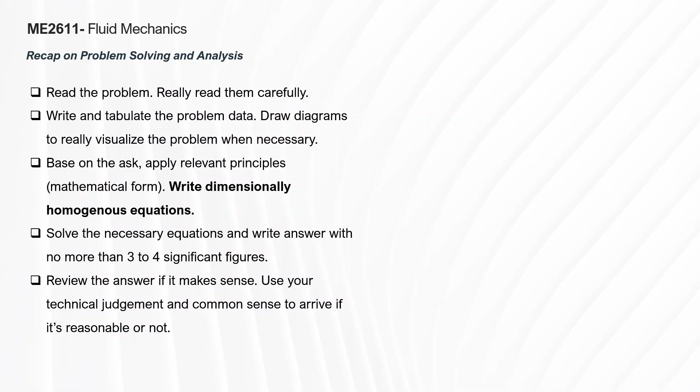Just to give an example, for here, like I said earlier, if you have 10,000 Newton per meter squared, basically that's Pascal, right? It's nicer to look at it this way. You can write, if that's your final answer, write here 10.0 kilonewton per meter squared, or essentially kilopascal. Okay? That's it, and then let's paste this.

Okay, so let's go straight in. Let's dive right into our answers. Oh yeah, one last reminder.

Make sure to review your answer if it makes sense. Back from your statics days, sometimes you get angles and you're looking for the direction from the positive x-axis, measured counterclockwise. Sometimes you get an angle from the other quadrant and you forget that it needs to be measured from the positive x-axis, so you need to add 180 degrees. Same applies here. Does it make sense with the signs? Does it make sense with the direction? So just review the final answer before boxing it up. Okay?

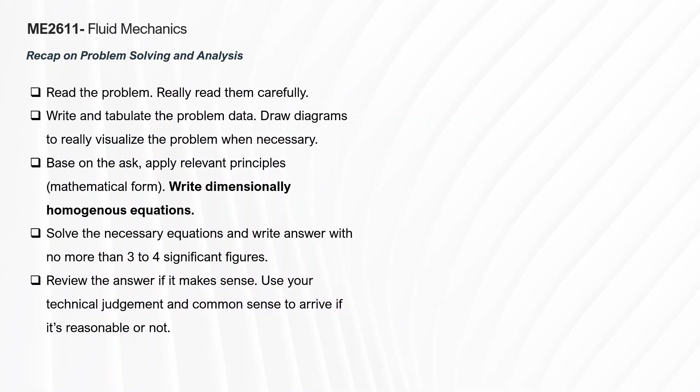Okay, so we have here: the viscosity of a fluid is to be measured by a viscometer constructed of two 40-centimeter long concentric cylinders, Figure 2-30. The outer diameter is 12 and the gap between the two cylinders is 0.15. So 12 is the outer diameter, and we have 0.15 here as L. Then the inner cylinder is rotated at 300 revolutions per minute. Take note it's revolutions per minute, so it's not yet angular velocity, you have to multiply this by 1/60, right? And then the torque is measured to be 1.8 Newton meter. Determine the viscosity of the fluid.

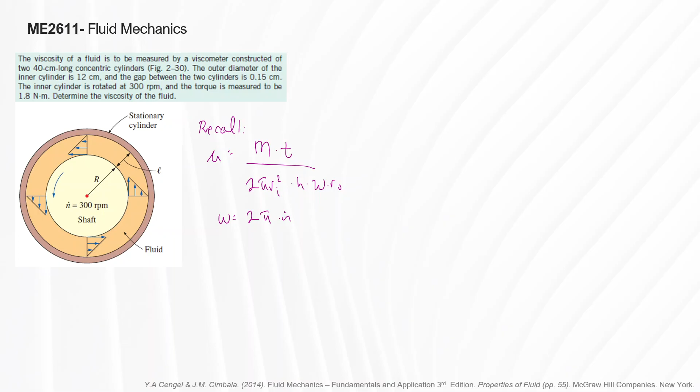Okay, recall that when using a viscometer, for this type of problem, we have the formula: Mt divided by 2 pi Ri squared times h, times W times Ro, where the angular velocity is on the outer diameter, and the angular velocity is simply 2 pi n. Okay?

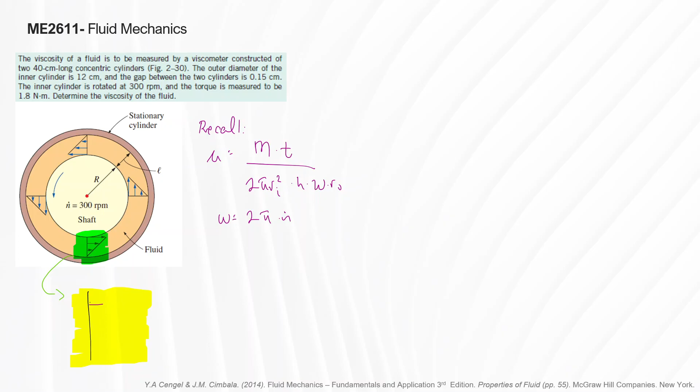So as you can imagine, this is also what I showed before. The U, essentially, is W times Ri that's used here since this is the rotating body, that's what's moving here. In books, you'll see it labeled usually 1 and 2, and for the equation du/dt, the equation is usually 1 minus 2, 1 minus 2. In this case, given is R1 minus R2, which is just the difference here, that's L. If you recall, this is point 2, this is the no-slip condition, so the velocity here is 0.

And here, it has velocity. So hence, we get from the outer diameter, velocity minus the inner diameter here. Okay, wait, it's actually reversed. So this is the inner, moving velocity minus the non-rotating body. Then you just substitute the values there, and you'll get the final answer as 0.158 Newton-second per meter squared.

Okay. Anyway, so this is... yeah, 0.06, there we go, cubed. Yeah, this is from last time.

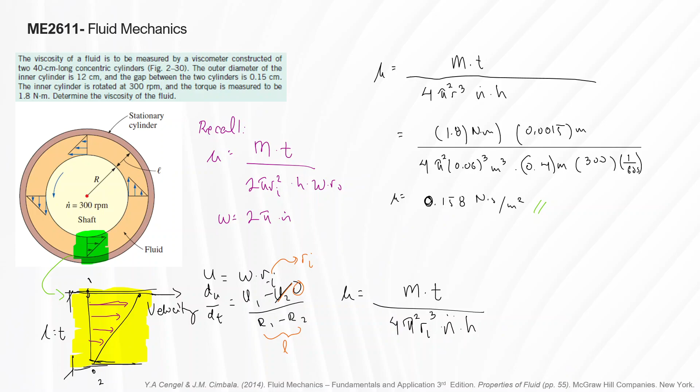So for our actual problem sets, we'll be dealing with much easier viscosity problems, I'll show you how. And then I've given you the problems boxed for you guys to answer. So take that home as your assignment. I've already given instructions, hopefully you've read them on Canvas. Let me know if you have questions there. I've also given the final answer so at least you'll have confidence to practice around this.

But I'm thinking whether I should keep giving the final answer until we reach finals, before finals. Maybe I'll give a problem set without the final answer to test your confidence instead.

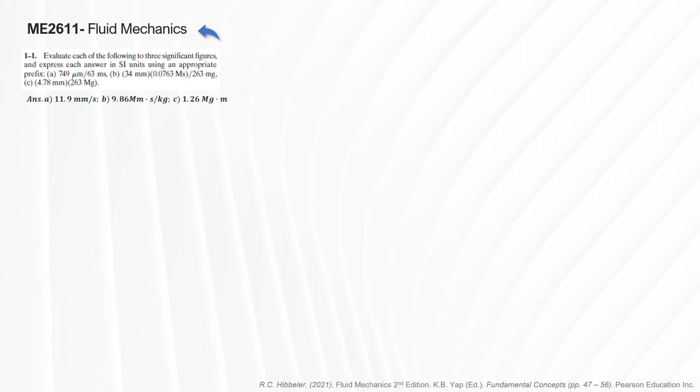Okay, so ano yung mga problems na yan? So far wala actually. Okay, actually meron pala to. So for A, we have milliseconds dito. We have megaseconds. Ito, with milligrams rin. And then ito naman with megagrams. So ang goal natin is, kailangan i-convert natin to at least base unit yung denominator. And then the rest, we apply yung appropriate prefix lang naman doon. Alright, so far so good.

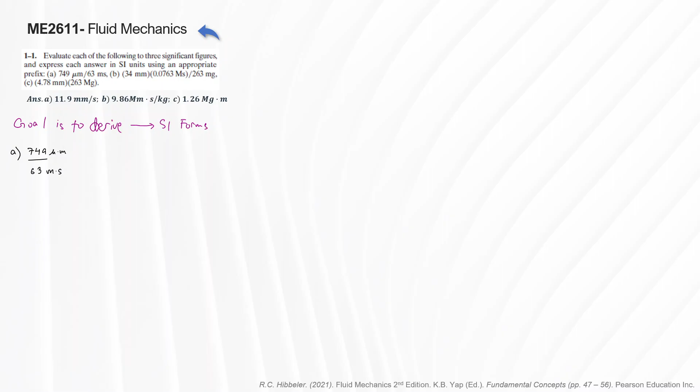So wait lang, let's go back dito. So let's go one by one lang naman. So the goal is to derive SI forms. Okay, so let's start with 749. So nakalagay dito, micrometer divided by 63 milliseconds. All you have to do lang naman is express mo na sila in their respective exponent form, scientific notation kumbaga. So ang base unit nito is meter.

Micro is 10 to the negative 6. And then ito, milliseconds, seconds yung base unit nito. And yung milli is 10 to the negative third. So if you recall pa yung rules of exponents, you just apply it, and you would get 11.889 times 10 to the negative third meters per second, or essentially this is just 11.9 millimeters per second. Pag lumabas sa exam to, is very specific naman. So 11.889, pero sabi sa akin is kailangan convert to into 3 significant figures. So kailangan 11.9 to, and then ilagay ko yung appropriate prefix. So 11.9 millimeters per second.

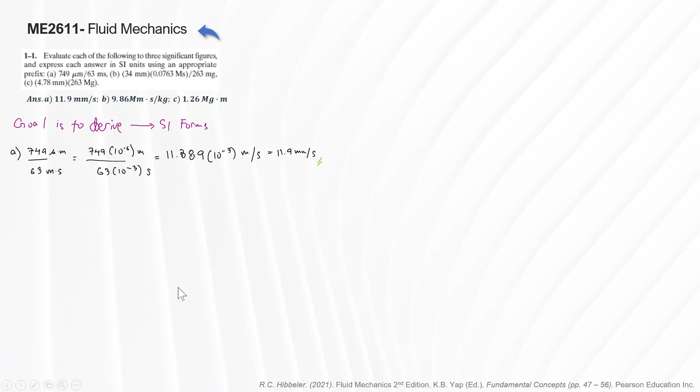Wait lang, I don't see yung questions dito. Okay good, so continue lang. Okay, so sa second one, ganun rin. So we have 34 millimeter multiplied by 0.0763 megaseconds divided by 263 milligrams. So medyo masakit tignan siya pag nakita natin yung operation. So we have to simplify it lang further.

Again we do it by just converting it, again, to its appropriate prefix. So yung scientific notation niya, yung milli magiging 10 to the negative third, yung mega magiging 10 to the 6, and then of course ito magiging gram. So like I said, kilogram is technically, gram technically yung base unit, pero kilogram is an accepted base unit kasi yun usually ginagamit natin. So kaya kinonvert ko na lang sa kilogram yan. So in this case, if makakita kayo ng gram, convert nyo na lang to gram sa denominator, convert nyo na lang to kilogram para mas magandang tignan.

There we go, so magiging 9.863. Dapat tinanggal ko yung 3, my bad. So magiging 9.86 megameter tapos second per kilogram.

Ganun rin with letter C, 4.78 times millimeter times 263 megagrams. You just convert them, then of course exponents to. So technically mag-add up lang yan into 1.257. So 1.26 dapat, okay, so 1.26 megagram meter. Question sa first problem.

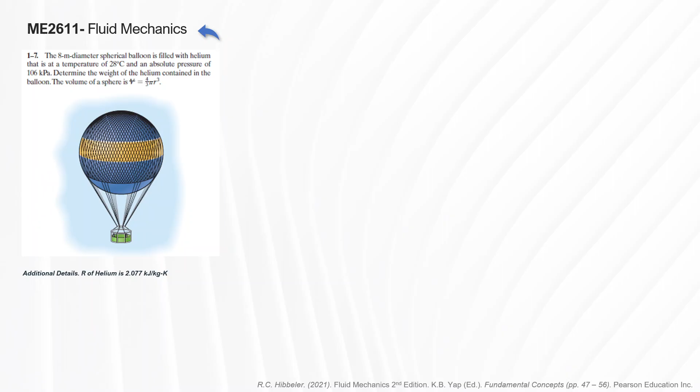So naglagay ako ng additional details dito kasi hindi available lahat ng details for helium. Kung titignan mo, we are required to find yung weight, take note, weight ng helium. At we're given temperature ng 28 degrees, tapos volume ng sphere, kinuha ko na, 8 meters in diameter with yung formula ng volume, and meron tayong absolute pressure na 106 kPa.

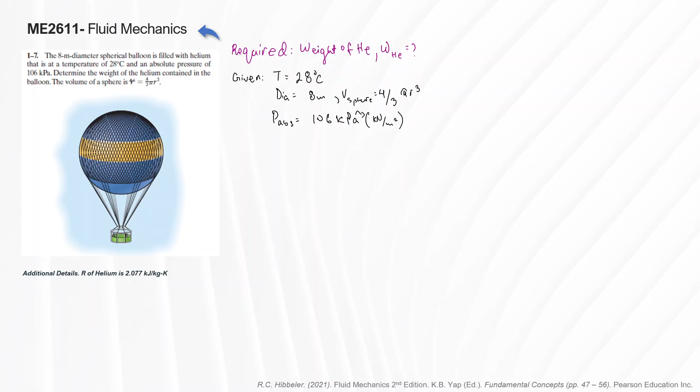106 kPa, well this is kilonewton per meter squared, okay? Now from the appendix ng book, obviously from the pagbibigay ko sa inyo ng exam, bibigay ko na itong additional details. Yung specific gas constant ng helium is 2.077 kilojoules per kilogram Kelvin.

So from here pa lang, from the given pa lang, you would think, hey, recall natin yung parang ideal gas equation problem to. We're given a temperature, we're given a pressure, we're given a volume na, and we're given R. So ang kailangan ko pala is yung PV equals to MRT.

Props dun sa mga nakakuha sa error ko, so tandaan nyo yung 1 o 2 points nyo dun. Pero recall na pag nilipat natin yung volume sa kabila, divide natin sa mass, magkakaroon tayo ng P equals to density RT.

Since we're being asked to hanapin natin yung weight, I just did it this way lang naman. So in short, hindi natin alam yung density dito, yun yung unknown. Going towards mass tayo, and then eventually weight. Kailangan natin yung absolute pressure divided by yung specific, in-arrange ko lang yung formula, in this case hinanap ko lang yung density.

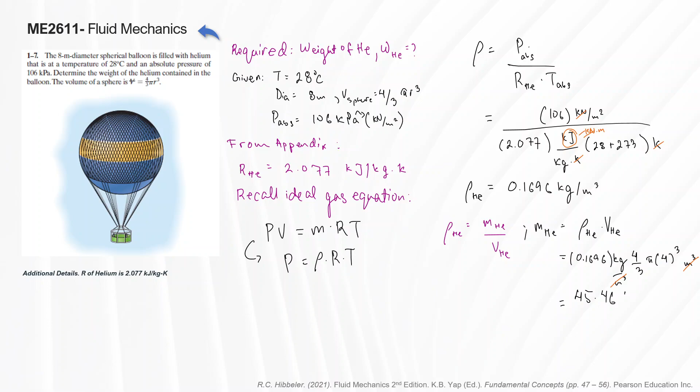Remember yung formula ng density equals to mass divided by volume, so mass is simply the product ng density and ng volume ng helium. We know na yung volume ng helium is 4/3 pi r cube. Remember diameter to, so ginawa ko, hinati ko lang siya, magiging 4 cube meter cube, cancel yung meter cube, and you will be left with 45.46 kilogram.

However, that is still not the final answer kasi we just multiply by the acceleration due to gravity, and we have, in this case hindi na gumamit ng proportionality constant. Magiging 445.87 newtons or 446 newtons.

Tanong ko lang po, pag po solving na ganyan, nakalagay po kasi for yung answer, pero pag po ganyan na 445.87, i-accept niyo po ba kung ibang way, parang 0.75 pag malapit na po, ano nakuha mong sagot? Well, sir, pag hindi po i-round off ng exact, pag po yung mga items, yes. Like I said, sa unang rule ko, okay lang naman yun, basta yung decimal places mo, yeah, okay lang sa akin yan.

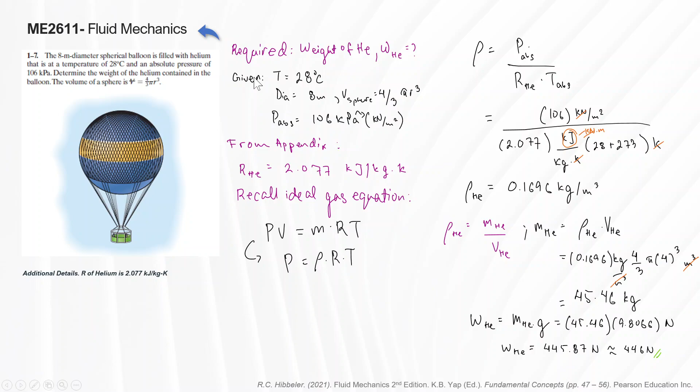Okay, wait lang, sa yung PowerPoint. Okay, so just one example ng ideal gas equation problem natin, ano? Sige, let's go for more. Balik tayo dito, okay, ano pa?

So ito yung helium. Okay, let's go naman with glycerin, something exciting naman ng konti. Okay, so let's just click this up lang.

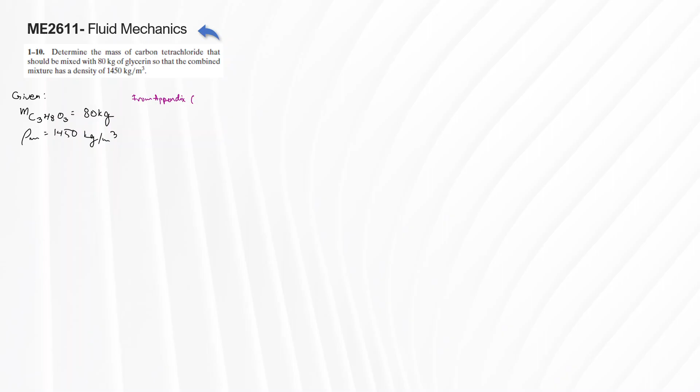Not sure kung binigay ko sa book to. Nag-provide ako ng additional details dito, like yung density ng glycerin, yung density ng carbon tetrachloride na galing sa book, and just like sa exams, I'll provide rin yun. Kasi come on, hindi ko matatandaan lahat, alam ko lang yung water, and even yung mercury, yun na yung pinaka-max. Okay, balik tayo.

Okay good, so kinuha natin from the book yan. Yung density ng glycerin natin is 1,260 kg per meter cube, and yung density ng carbon tetrachloride natin would be 1,590 kg per meter cube.

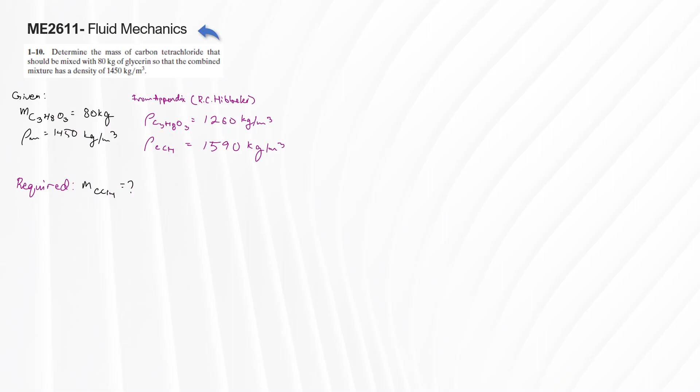Kailangan natin malaman is yung mass mismo ng carbon tetrachloride. So ang solution natin, if you recall, yung density is equals to mass ng substance, or in this case mass ng mixture divided by yung total volume ng mixture. So that would make sense na yung mass ng mixture is equivalent to the sums ng mass ng glycerin and ng carbon tetrachloride natin, ganun rin with its volume.

So kinuha natin yung volume ng given natin na glycerin. Kinuha ko rin yung volume ng tetrachloride. And then I just equate lang yung equations na yun, just like so, para ang matira lang natin is yung mass ng tetrachloride.

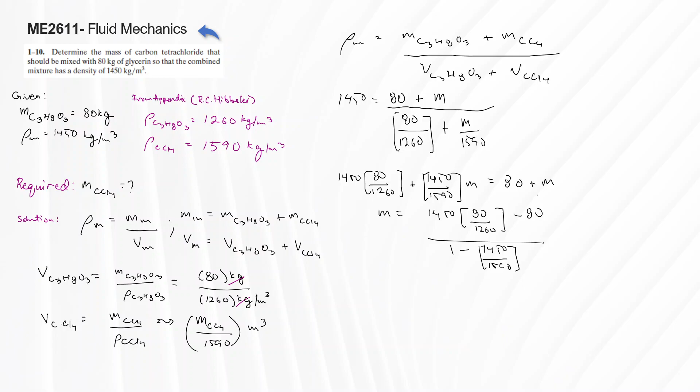We have yung 80 over 1,260 equals mass over 1,590, 80 plus m. And ang matitira natin dito, i-isolate natin equation ng m. And we have 137 kilograms.

Now okay, paano natin check to? Substitute 137 dito sa density, and then solve natin yung volume. And then if yung density mo is 1,450, or close to 1,450, we're good.

Yung mga steps ko sometimes may be a longer method, pero sometimes I realize mas magandang ipakita ko yung longer way lang naman, because yung shortcut can be down the line na lang naman. So it's important for me to break it down for you guys rin. So if you did this in a much shorter way pero we still arrive with the same answer, that's fine by me. As long as I read it and I understood it, sige. Pero pag di ko naintindihan, tatawagan naman kita, paano mo nakuha to exactly? Pag in-explain mo, that's fine, pero pag maraming tanong, ako pag-isipan ko kung consider pa yung question na yan.

Alright, so easy peasy lang, no? Almost direct substitution lang, so ang important analysis dito, yung bulk ng work mo is actually nandito na. Nag-analyze ko muna ng given mo and then you establish yung equation na gagamitin mo, and then from there is just execution na lang. And then the rest is practice.

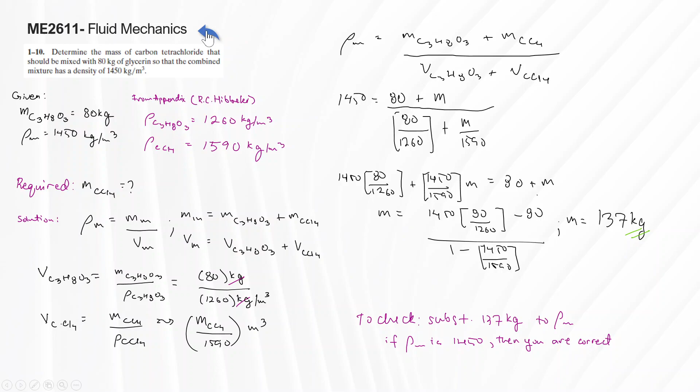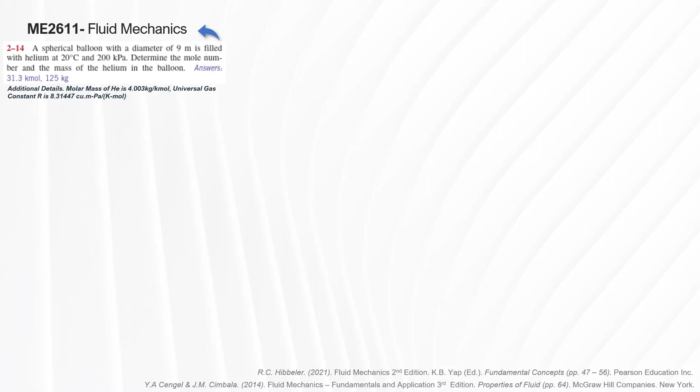Let's imagine this is the sphere, with a diameter of 9 meters. You can interpret the given this way too, draw it however is comfortable for you. We have the temperature of 20 degrees here, and we know there's a pressure of 200 kilopascal.

Take note that this is 20 degrees Celsius, not absolute temperature. And I believe it wasn't stated... what did I write here... I believe 200 kPa, we can assume this is absolute pressure too. So we're here to find the symbol for mole number, N, capital N helium, and then the mass of helium.

Here are our other givens. We're given 8.31447 - I just converted it a bit so our cancellation later is exact. So I removed the Pascal and made it kilopascal, removed the mole and made it kilomole, to go directly into the cancellation when we use the gas constant. So this is technically still the same: 8.31447 kilopascal meter cube per kilomole Kelvin. And then we have the molar mass, 4.003 kilogram per kilomole.

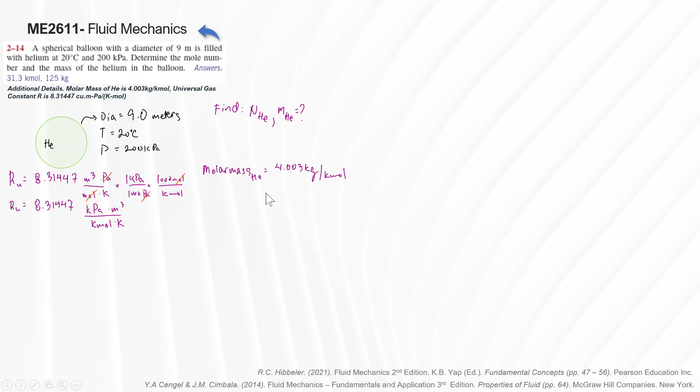So these are our givens. We know mole is involved, so the formula we'll use instead of the standard PV=MRT, we can also use PV equals nRT.

This is the conversion from mole number times molar mass to actual mass - that's the purpose of molar mass, you multiply it to the mole numbers to get the mass. But in this case, I think we can get the mass first - actually, we'll get the number of moles first.

Let's equate and rearrange our equation further. Our unknown is N. N is equal to pressure times volume divided by the gas constant times the absolute temperature. You substitute the values as such.

So we have 200 kPa - yes, that's right. When it's not stated as absolute pressure, you just assume - you can assume it's an ideal gas, and you can assume it's absolute pressure there.

And then the volume, which we remember is 4/3 pi r cube. We have a diameter of 9, so the radius is 4.5, so that's 4.5 cubed. And then we substitute R, which in this case is the universal gas constant. Since what's involved here is moles, we use the gas constant - a bit of background from your chemistry before.

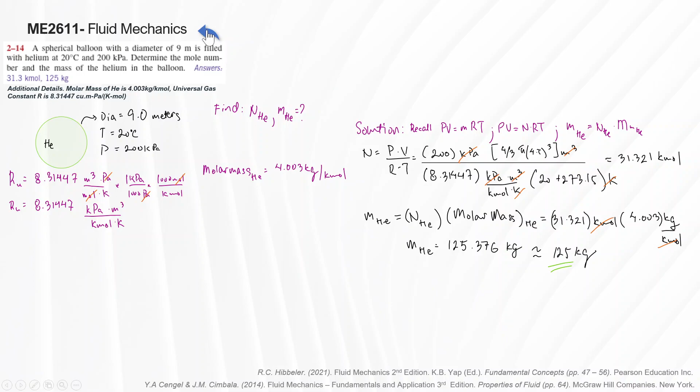Okay, anyway, let's go back here. So that was fun, right? Sometimes the given translates that way, but if you manipulate the formula well enough and know your basic chemistry principles, you can still figure it out. Either way, when I give a problem, I'll still give additional details so you won't have to go searching everywhere.

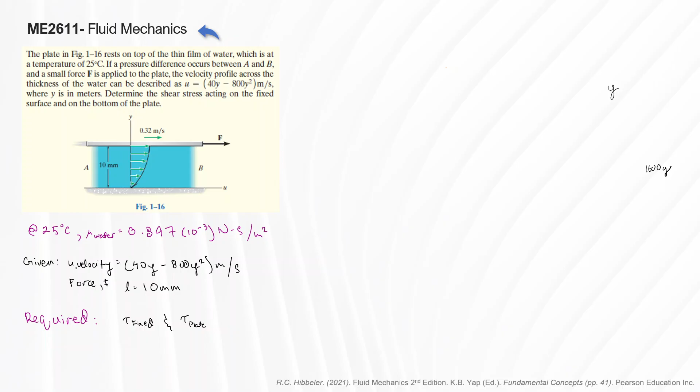So ito yung symbol ng shear stress natin, tau. Recall that yung shear stress is yung dynamic viscosity times yung velocity gradient, du dy. Remember, this is yung velocity profile, non-derived pa siya, so meaning i-differentiate mo pa siya, okay? Just bear with me lang. Do not be intimidated with this du dy thing, okay?

So ano ba yung silbi nan? Remember ito, pag nag-derive ka dyan, mag-equivalent niya is 40 minus 1,600y to the negative 1. Diba? So ito yung gagamitin natin equation. Ito yung derive, ito yung equivalent niya, okay?

So kailangan lang natin malaman muna is yung from the non-fixed plate. So from here, obviously yung velocity natin dito is 0 eh. Remember, lagyan mo na ng 0.1 and 2 to. Okay, 1, 2, 1 minus 2. 1 wherein 0.1 mo may moving velocity ka, 0.2 mo is yung usually yung fixed surface mo.

So yung y na to, ito rin naman yung 10 millimeter. Sorry, nilagay ko na lang as L, dapat y ko na lang nilagay. So ang ginawa ko na lang dito, we just substitute lang naman yung y. So ito yung from the non-fixed plate, so yung distance dito is 10 millimeter or 0.01. I simply substitute it lang dun sa y value ng 1,600y. And then if you would multiply them all together, you will just reach yung 21.5 millipascal.

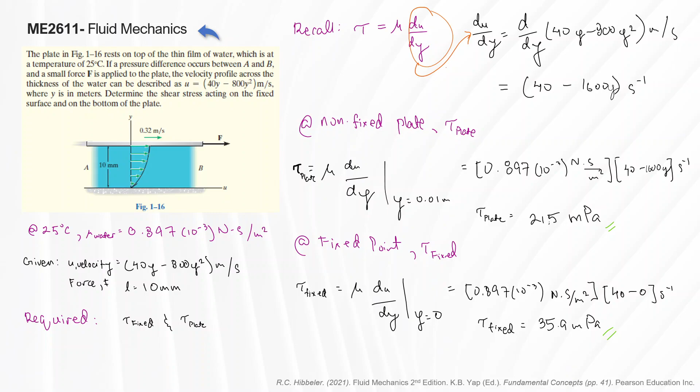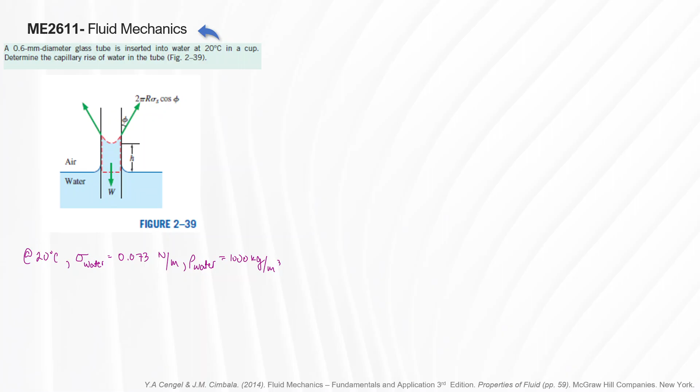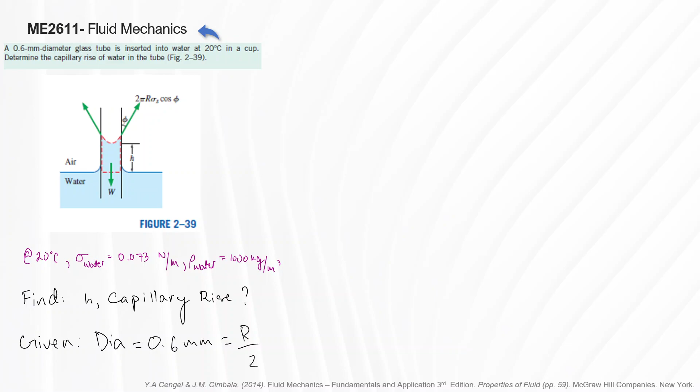So H, basically yun yung formula ng H, ano? Yung H ang hinahanap natin. Capillary rise ba or drop to? Okay? So we're given yung diameter na 0.6 millimeter. So divide na lang natin by 2 yan eventually.

So ang solution natin, kung ma-recall natin, yung capillary rise or drop is simply 2 times yung surface tension, sigma, I believe it's sigma, divided by density times acceleration due to gravity times yung R, or radius. Okay? Not sure kung ba dinivide ko by 2 to, pero dapat dito pala ako dinivide yan. Ano? So, radius to, by the way.

Tapos, times cosine phi. Alam natin, pag water, it's usually 0 degrees. Okay? Pag hindi binigay, tapos water nakalagay, and then walang binigay na angle, that's 0 degrees. G is 9.8066, and then water is 1,000 kilograms. Okay? So, we just plug and play na lang dito. Right.

We can probably have a modification lang siguro pagdating sa R natin dito. We can just make this parang radius lang, like we should. Kasi pag R, makakalain natin gas constant, no? Sige. Okay?

So, multiplying everything dito, so 2 times 0.073 Newton per meter, over 1,000, times 9.81 meters per second squared, times 0.6 times 10 to the negative third meters. Okay? Kasi naka-millimeter siya eh. So, yan. So, yung conversion lang nun. Cancel. And then, times cosine 0 degrees.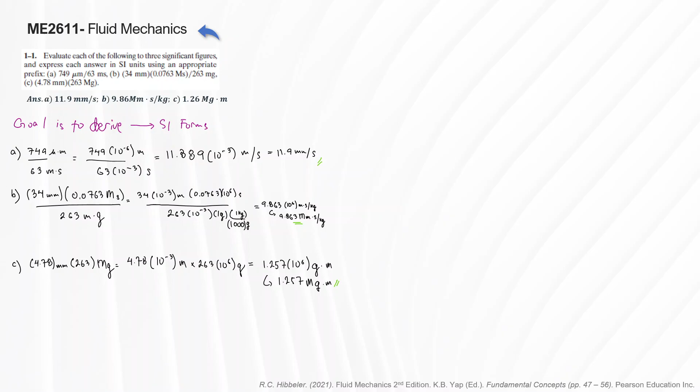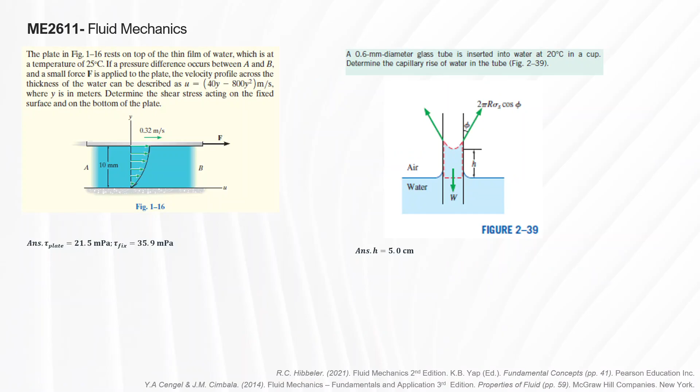It's definitely a good warm-up. Okay, ano yung next natin dito? Saan tayo nag-stop? Dito tayo nag-stop, ano? So that's easy peasy. And then i-return tayo. Nakalimutan ko i-return to dun sa second page. My bad. After nito, eto tayo.

So, eto naman, gusto lang bigyan yung profile nito. Another type of example lang naman ng viscosity problem. Meron kang fixed wall, and then meron kang moving wall, and then merong plate na dumadaan in between. So, essentially, fixed, moving. Paano yun? Okay, puntahan natin yung problem. I believe nabigay ko lahat yung given naman na dito.

So, there we go. So for this problem, we assume two things. Yung thickness of the plate is negligible dito, guys. And number two, the velocity profile in each oil layer is linear unless otherwise specified. So, okay lang to assume those. Now, we know the force is being pulled horizontally just like so.

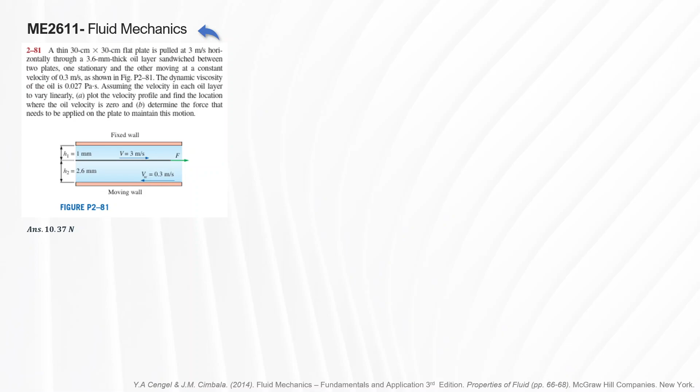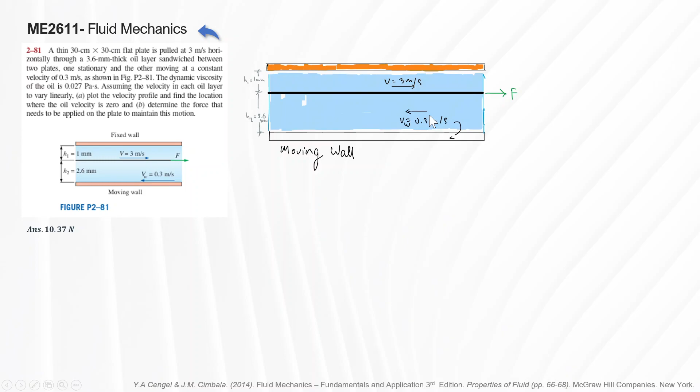And then, we also know that there are two velocities involved. One, the plate itself at 3 meters per second and the moving wall at 0.3 meters per second. So, i-reflect natin yun. Okay, so sometimes inuulit ko yung drawing para ma-analyze ko. So, ito yung moving wall, pero pabaliktad, 0.3 meters per second. So, moving yan ha, meron kayong plate at 3 meters per second pag ganun siya. And then, meron tayo yung fixed wall, okay?

Let's just call it orange na lang, okay? Hindi ko na kinulay yung moving wall. So, yung orange na to, yung fixed wall. Tapos, may kanya-kanyang thickness, 1 millimeter and then 2.6 millimeter. Okay? This tells us that there will be also two velocity profiles and then two velocity gradients, of course. So, at least on that end, alam natin na hey, magkakaroon ng iba yung profile nito kasi pabaliktad siya. And then iba rin yung profile nito kasi una sa lahat, pakanan siya, ito pakaliwa. So, mag-iiba yung itsura ng profile.

When I say yung profile, yung basically parang triangle representation natin yun. So, para natin gagawin yun. So, the velocity profile from the fixed wall is easy. Madali lang yan kasi alam na natin, no slip condition. So, si stick dito, idadrag niya yung ibang liquid dito, iba yung velocity profile dahan-dahan. Hanggang papalapit doon sa moving plate. So, more or less yung itsura niya pag ganito. Okay, nasa na yung drawing?

Yeah, most like, yeah, so ganyan. So, towards the right, most likely ganito yung velocity profile niya. Now however, the other wall plate naman is moving in the opposite direction. So, itong moving wall na to is moving on the separate direction. Ito kumokontra to, so iba yung nagge-generate ng velocity profile naman on this area kasi ito pakanan. Ito naman, iba yung generate nitong velocity profile kasi ito pakaliwa. Paano magiging itsura nun?

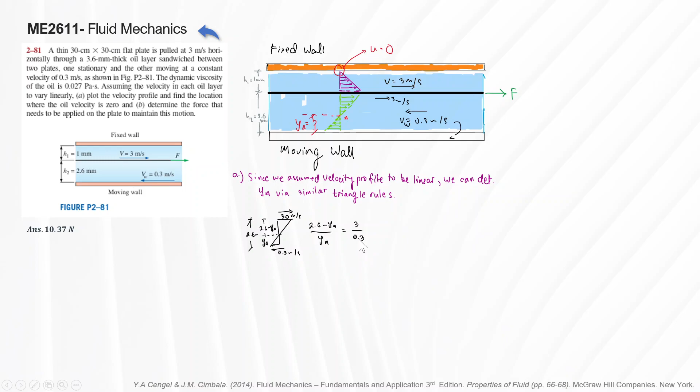So, 2.6 YA is equal to yung height nito, and then yung 3 meters na to, 3 meters per second mo, ito rin yung ratio rin. So, 3 divided by 0.3. Okay? And then, makukuha mo na yung YA nyo doon at 0.2364 millimeter from the moving plate.

Not exactly necessary naman for the equation, pero it will be necessary to determine yung force needs to be applied on the plate to maintain this motion.

Anyway, balik tayo sa problem ulit. So, medyo na-excite lang ako dito sa explanation ng fixed wall and moving wall. Now that we know na yung dimensions natin doon, yung thin plate natin dito is 30 by 30 centimeters, being pulled horizontally 3 meters per second through a thick 3.6 millimeter oil layer.

Kaya ako nalaman ng 1 millimeter dito, 2.6 kasi given na siya. Okay, so dito yung 1, total niya is 3.6. Okay? And then two plates, and then one stationary and the other moving at a constant velocity at 0.3 meters per second. Shown in the figure below. So ito siya. So ito yung given na.

Ang wala lang natin dito is hindi natin alam yung velocity profile and hindi natin alam yung na-create na thickness na to sa kontra ng 3 meters and 0.3. Now, binigay na sa atin yung dynamic viscosity ng oil at 0.027 Pascal second.

Assuming the velocity in each oil layer to vary linearly, so yung A, nakuha na natin yung velocity profile and find the location where the oil velocity is 0. So, two locations na naman yun. One is here and then another one is here kasi nga nagko-kontra sila. So, we did that na.

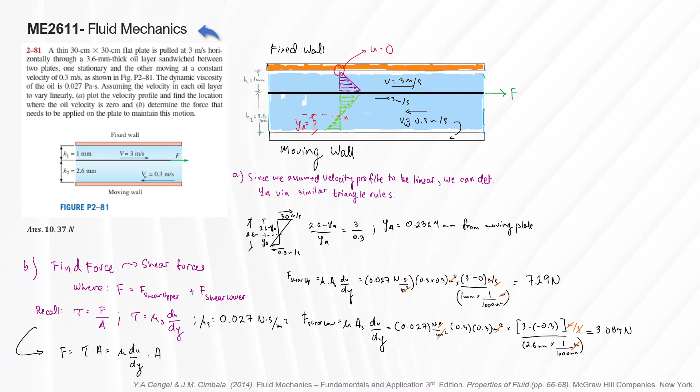We have, I believe, 2 more problems na lang. So balik tayo dito. So ito siya. Velocity profile, optional, baka hindi kasi magets.

So next dito is, okay, dalawa na lang. 2.79 and yung 1.47. Ito medyo exciting to, kasi kaya natin isolve yung A eh. Determine yung force needs to be applied, direction na yun. Tapos yung next question naman dito is what if merong oil dito eh. So let's go with the problem lang muna. Paano kung binigyan kayo ng ganitong klaseng problem?

May konting statics. Hopefully, you still recall yung statics nyo with your Sir Edward. So we're given a 50 by 30 by 20 centimeter block weighing 150 newtons and is to be moved at a constant velocity of 0.8 meters per second on an inclined surface with a friction coefficient of 0.27. Doon pa lang you got clues na okay, we get the weight, we get the velocity, and we're given a friction coefficient, so mayroong frictional forces involved.

So A, determine the force F that needs to be applied in the horizontal direction. Okay, that's easy. Kailangan lang natin isulat yung FBD, alamin natin yung forces, and then alamin yung horizontal force na yan in the horizontal direction. So F. And then B, if a 0.4 millimeter thick oil film with a dynamic viscosity of 0.012 Pascal second or Newton second per meter squared is applied within the block and inclined surface, determine the percent reduction in the required force.

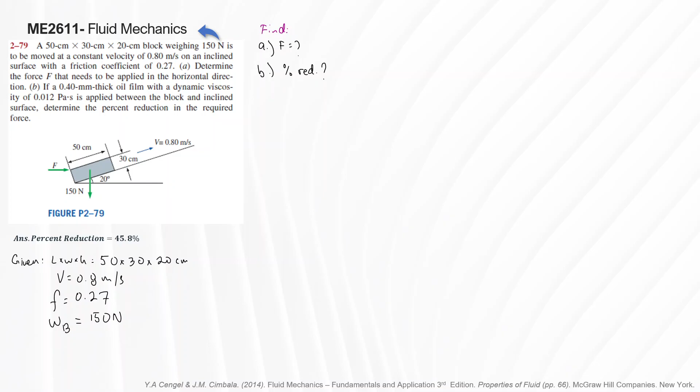At alam ko yung weight ng block which is 150 newtons. So we're asked to find two things: yung force and then yung percent reduction pag na-apply yung oil naman. Okay? So of course yung solution natin, let's recall muna yung statics natin. Let's draw yung FBD or free body diagram.

So we have yung inclined plane na to and yung mga forces niya. We know na yung weight is 150 newtons is pointing downward. And then meron tayong coefficient of friction daw, so kontra yon lagi sa block along the inclined, so dito yon. Tatawag dito, on an inclined surface with a friction coefficient of 0.27. So on an inclined surface, ito yung most likely ito yung frictional forces niya. And then we're given an angle elevated at a 20-degree angle.

So pag tinira natin ng ganyan, similar angles to, 20 degrees to. Then obviously, nakatouch siya on a solid surface, so meron rin pang kontra yung meron yung reaction yung inclined surface mo. So don't forget yung normal force mo dito. Okay, and that's 20 degrees rin yan.

Now, if you recall the equation of equilibrium of a particle or body, you know that the summation of forces in x and y would be equal to 0. So we laid out the x forces first, that's equation 1. We laid out the y forces, that's equation 2.

So for x forces or horizontal forces, essentially it's F, what we're solving for, minus the friction, FF, and then cosine 20 degrees. And then, of course, the normal force - that's about sine 20, from the incline.

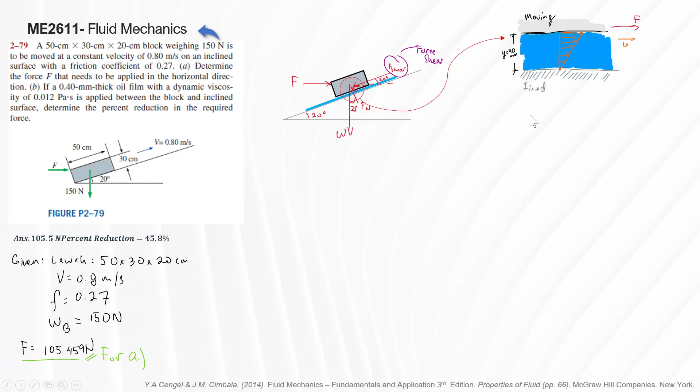Okay, let's solve it. Remember this part, basically if I expand it, it's the same thing. So we have the force here, we have 40 millimeters here, and obviously we have a maintained velocity. This fixed part here is the inclined plane, and this is the portion of the box - the block. So that's the moving part. Essentially it's the same thing. So we have the moving velocity here, we have the fixed part here. So how do we proceed from here?

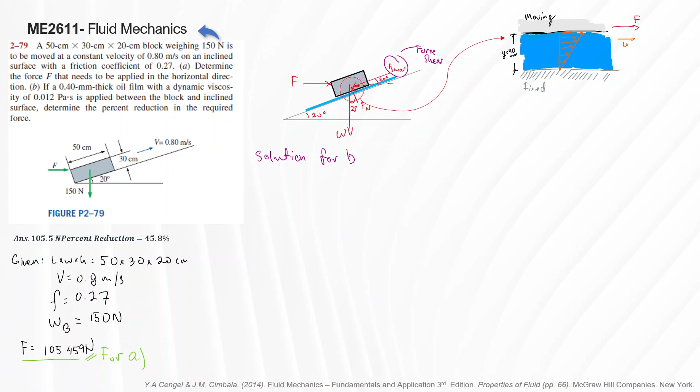We're now going to solve for B. How do we do that? So obviously, we already know our given here, and we know the operating area of the oil. It's good to know the area because we'll use the formula shear stress equals force over area. But of course, our shear stress equals the product of the velocity gradient times the dynamic viscosity. So it's 0.5 by 0.2, because we're talking about length, width, and height. So that's 0.5 and 0.2.

So recall our forces like that, and we can equate our equation just like so. Our force equals dynamic viscosity times the area sheared, times the velocity gradient. So 0.012 times 0.5 times 0.2, and again, the velocity gradient.

So let's start with du. The moving one is 0.8 minus the non-moving, so that's 0. And then the space in between is 40 millimeters, so that's 0.04. And you would get 2.4 Newtons.

The equation isn't done yet because we need to know the percent reduction, right? So for the new force - this is the shear force here. So let's go back, let's find the new applied force. What's the applied force in the horizontal direction? We just simply replace the frictional force with the shear force, and we would get...

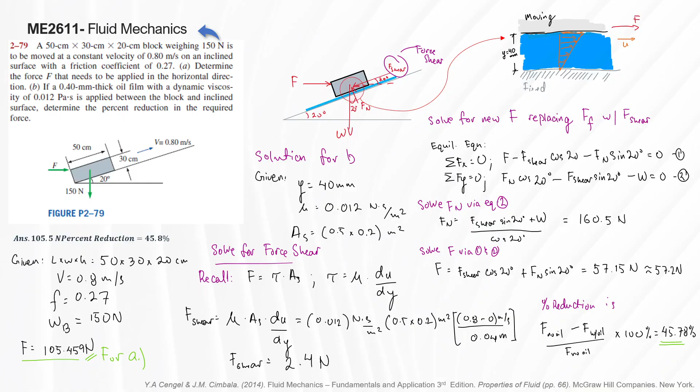Okay, last problem. Finally, another viscometer problem. I promise this is a lot simpler than last time. If I ever show a problem like this, most likely it will be like this one. I promise it's very easy once you read it.

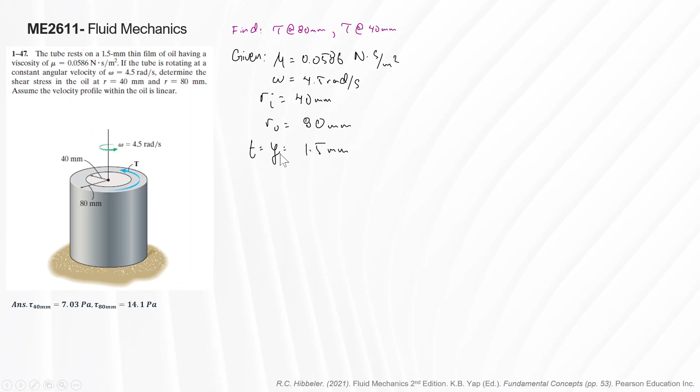Recall, the solution for shear stress is simply dynamic viscosity times the velocity gradient. In this case, we can replace du/dy with dr/dt since du refers to the difference in radius. And dy we can replace with t, which is the thickness of the oil here.

So this is the angular velocity, and t is equal to y as well. So let's substitute. At 40 millimeters, mu times the velocity gradient at 40 millimeters - what does it look like? It's just this.

So we just substitute the angular velocity times the respective radius at 40 millimeters. The thickness is still 1.5 millimeters, so things still cancel out. Cancel the seconds, cancel the millimeters. That gives us 7.032 Pascal, or Newton per meter squared.

At 80 millimeters, same process. We're given the dynamic viscosity. We simply multiply and substitute, and we get the answer of 14.06 Pascal.

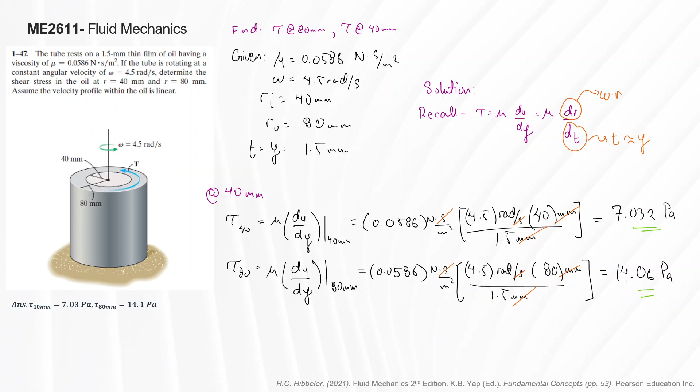Let's go back to this. So yeah, that's pretty much it. Technically I can end the presentation here. Actually, I'm going to end the presentation here.